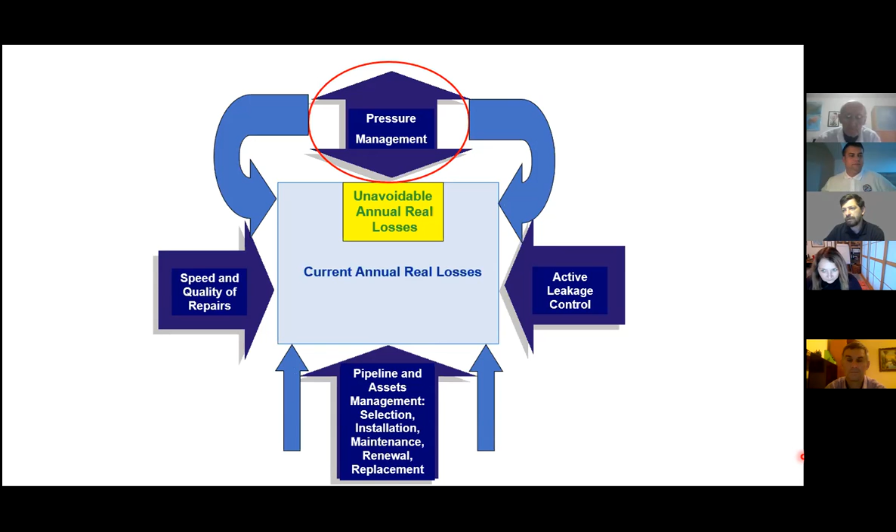Așa că înainte de 1995, din 1979 până în 1980, au existat două rapoarte Ogura în Japonia, și raportul 26 în Marea Britanie, în care se spunea că reducerea presiunii în sistemele de distribuție a redus debitul de pierderi mai mult decât prevedea teoria hidraulică, care afirma că viteza debitului de pierderi variază cu presiunea la puterea 0,5. Totodată se spunea că șocurile de presiune trebuie controlate deoarece provoacă avarii.

Din 1980 până în 1994, se spunea că utilizarea managementului presiunii pentru a reduce avariile din sistemele de distribuție și pentru a prelungi durata de viață a activelor a fost rareori menționată, nu a fost cuantificată, nu a fost înțeleasă, nu a fost raportată și nu era utilizată pe scară largă.

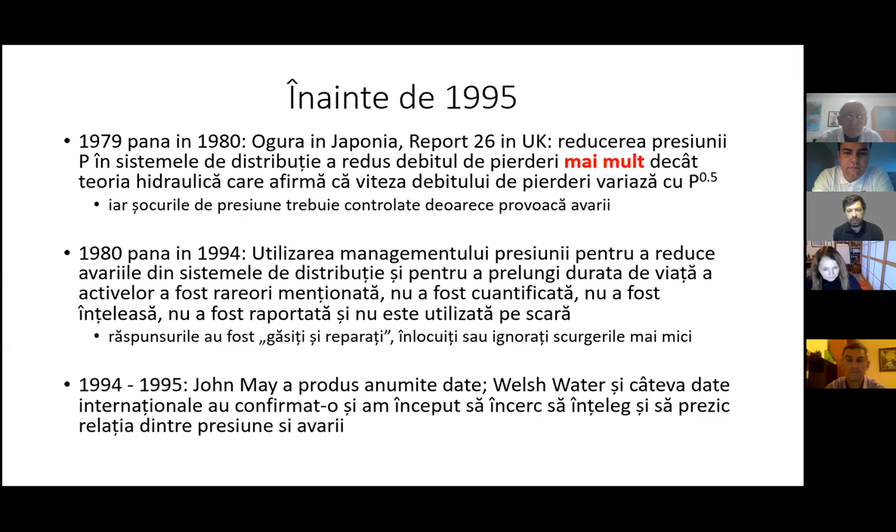Răspunsurile generale erau de tipul găsit și reparați, înlocuiți sau ignorați scurgerile mai mici. Din 1994 până în 1995, John May a produs anumite date de la compania Welsh Water, iar câteva date internaționale au confirmat-o, și am început să încerc să înțeleg și să prezic relația dintre presiune și avarii.

This is the man, John May, unfortunately dead now. He died too young, who inspired me to study pressure leakage and pressure burst relationships. With colleagues in the UK National Leakage Control Initiative 91 to 95, I had tried to understand why pressure leak flow relationships varied so much. When I first heard John speak about his 1994 World Water article, I realized he had found the answer which we had failed to find. I've continued to promote his FAVAD concept since then, initially simplified as the N1 power law, or with full fixed and variable area analysis.

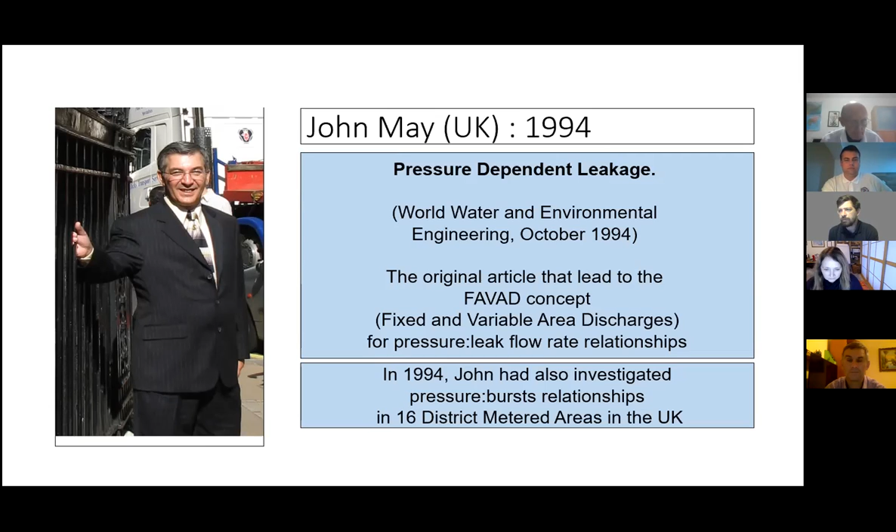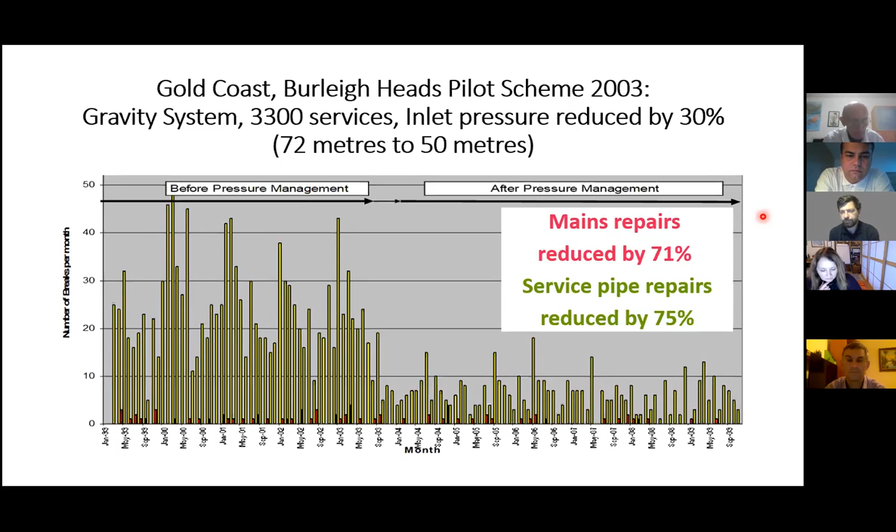Pearson and several task force members gathered before-and-after data from 50 zones in the UK, Brazil, Italy, and Australia. Some zones showed large reductions in bursts, others not so much.

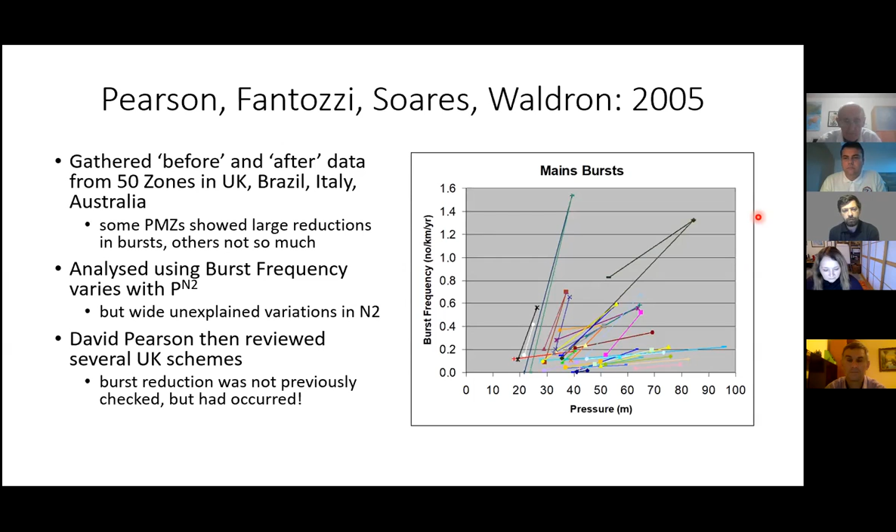Here is one of several UK examples. The pressure had been reduced from 100 meters to 50 meters in 2001, but the possibility of a change in burst numbers had not been considered. Here is one example from the UK. The pressure had been reduced from 100 meters to 50 meters in 2001, but the possibility of a change in burst numbers had not been taken into consideration.

Retrospective analysis by David showed that bursts reduced in this DMA from 34 in 2000 to 3 in 2001, 6 in 2002, 1 in 2003, 0 in 2004, and 1 in 2005. If you do not keep reliable monthly records of numbers and types of burst repairs, this kind of result can easily be missed, especially in a large utility.

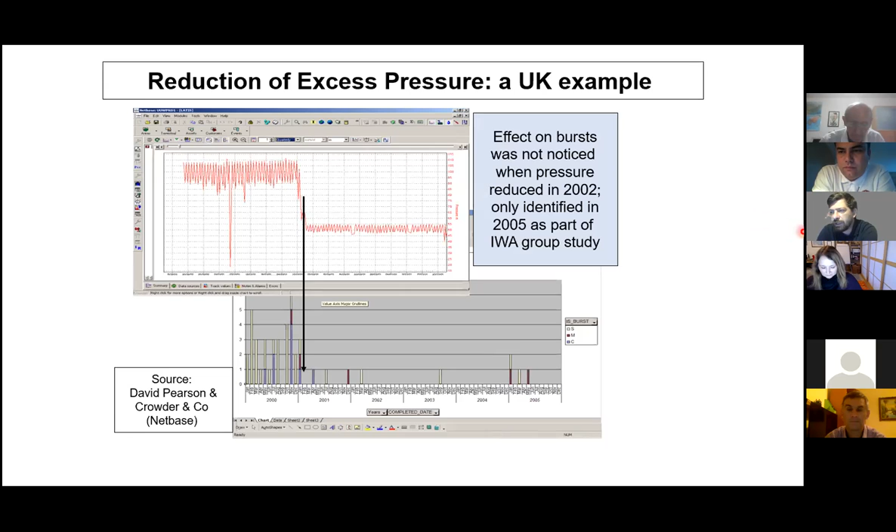Conceptul de picătură care umple paharul din 2006. Ideea este că mai mulți factori contribuie la deteriorarea unei conducte, dar presiunea în exces este acea picătură care va umple paharul. Factorii sunt vechimea și corodarea conductelor, influențe locale, cum ar fi încărcările din trafic, influențe sezoniere, cum ar fi mișcarea solului, temperatura.

Thornton și Lambert au analizat date din 112 zone din 10 țări și au propus următorul lucru: un anumit procent de reducere în rata avariilor înseamnă 1,4 ori acel procent în reducere din presiunea medie pe zonă. Deci trebuie prioritizate zonele cu frecvențe mari ale avariilor și cu cele mai mari presiuni în exces, iar apoi se realizează predicții separate pentru conducte și pentru branșament.

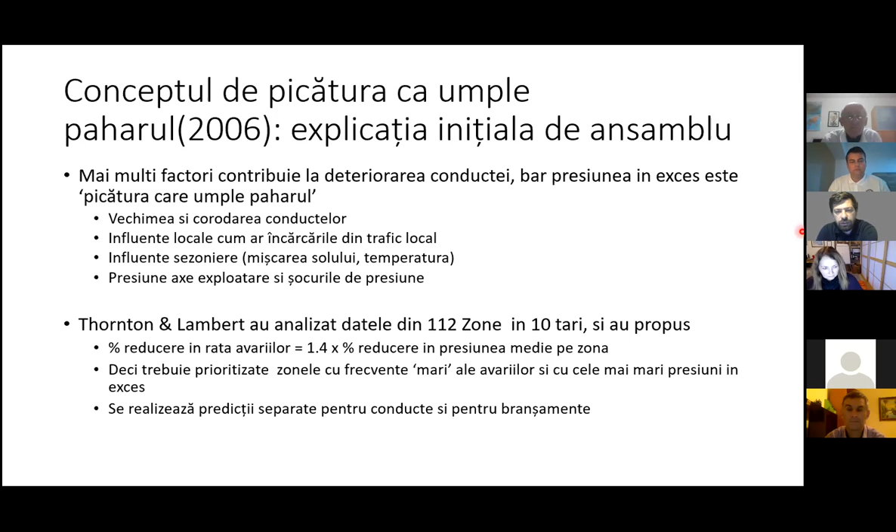This is a simplified graph of failure rate against average zone pressure. When new mains and services are laid, they are designed to withstand the existing maximum daily pressures with a large factor of safety. Acesta este un grafic simplificat al ratei defectelor față de presiunea medie din zonă. Atunci când sunt instalate conducte și branșamente noi, ele sunt proiectate să reziste presiunilor zilnice maxime existente cu un factor mare de siguranță.

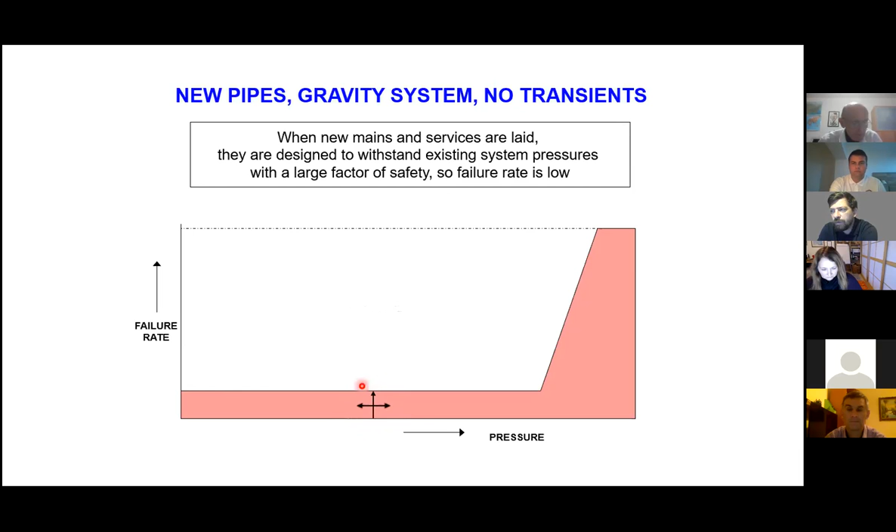If the new pipe system experienced pressure transients, the factor of safety will be reduced, but the failure rate should remain low if the maximum system pressures remain within the factor of safety. În cazul în care noul sistem de conducte prezintă șocuri de presiune, factorul de siguranță va fi redus, dar rata defectelor ar trebui să rămână scăzută dacă presiunea maximă din sistem rămâne în interiorul factorului de siguranță.

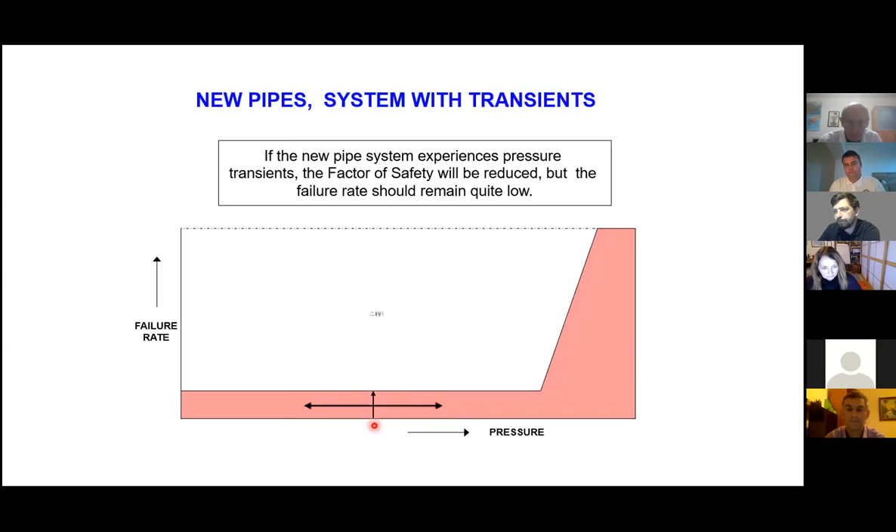As the pipes deteriorate through age and corrosion, combinations of local and seasonal factors reduce the factor of safety. Can you, that's it, thanks, Casey.

Traffic loading, ground movement, low temperatures, and the pressure at which failure occurs reduces until at some point in time, the burst frequency starts to increase significantly when maximum system pressure occurs. Pe măsură ce conductele se deteriorează din cauza vârstei și a coroziunii, combinațiile de factor local și sezonier reduc factorul de siguranță: încărcarea din trafic, mișcarea solului, temperaturile scăzute. Presiunea la care apare defecțiunea se reduce până când la un moment dat frecvența avariilor începe să crească semnificativ atunci când apare presiunea maximă din sistem.

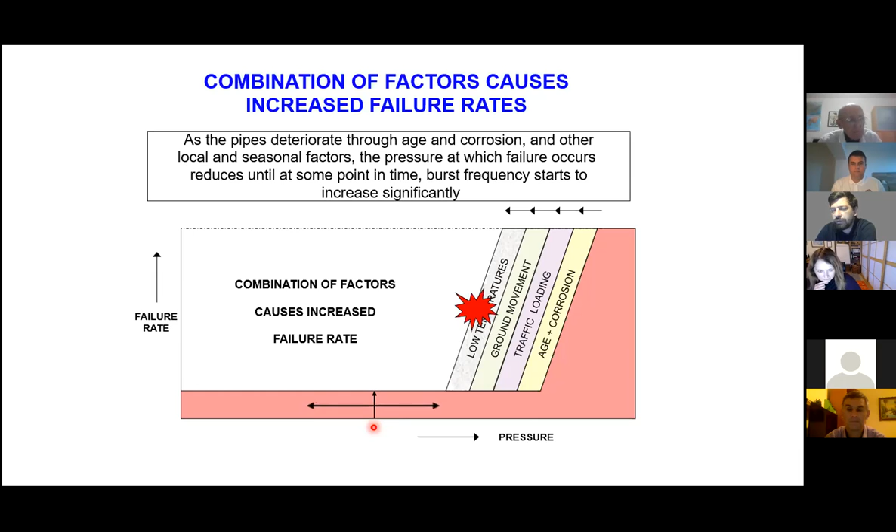Step 1 is always to check for the presence of pressure transients and reduce their range and frequency. This increases the factor of safety and can immediately reduce the burst frequency. Primul pas în reducerea presiunii este verificați prezența șocurilor de presiune și reduceți intervalul și frecvența acestora. Acest lucru va mări factorul de siguranță și poate reduce imediat frecvența avariei.

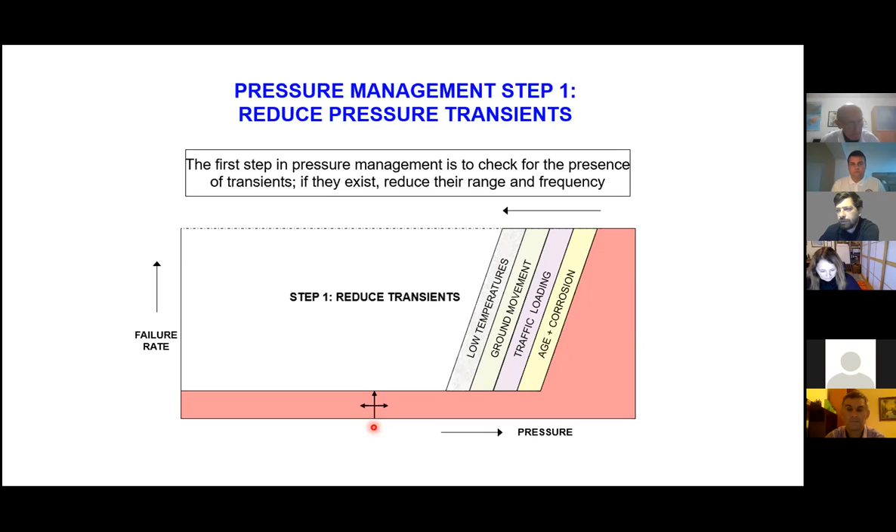Pressure management step 2 is to identify and reduce the excess maximum pressures. If the maximum pressures at the critical point are higher than necessary, then reduce the excess by pressure management to avoid operating the system close to pressures that will cause failures. Al doilea pas în managementul presiunii este identificați și reduceți presiunile maxime în exces. Dacă presiunile maxime în punctul critic sunt mai mari decât este cazul, reduceți excesul de presiune pentru a evita funcționarea sistemului aproape de presiuni care vor provoca defecțiuni.

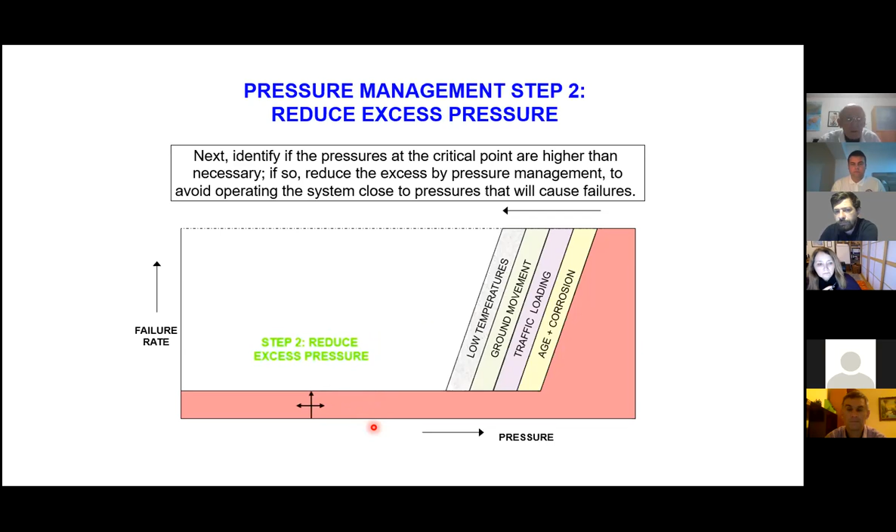So here is a simple approach to identifying zones with potential for burst reduction. If the current failure rate is quite high, that's the red circle, then even a small percentage reduction in pressure can produce a large reduction in burst frequency. But if the burst frequency is already quite low, the blue circle to the green circle, then further pressure reduction may not greatly reduce the current burst frequency, but it should extend the factor of safety and the infrastructure life.

Iată o abordare simplă a identificării zonelor cu potențial de reducere a avariilor. Dacă rata curentă de defecte este destul de ridicată, cercul roșu, atunci chiar și o mică reducere în procente a presiunii poate provoca o reducere mare a frecvenței de avarii. Dacă frecvența avariilor este deja destul de scăzută, cercul albastru până la cercul verde, reducerile suplimentare de presiune nu pot reduce frecvența actuală de avarie, dar trebuie să extindă factorul de siguranță și durata de viață a infrastructurii.

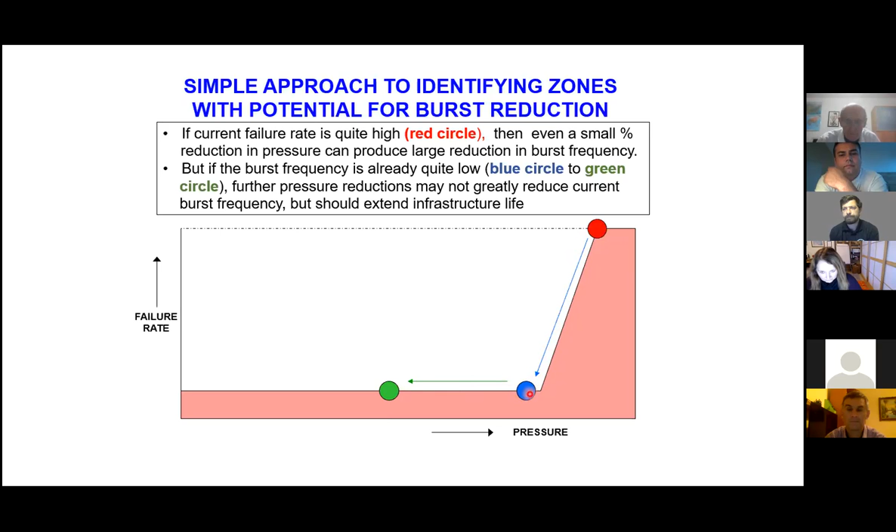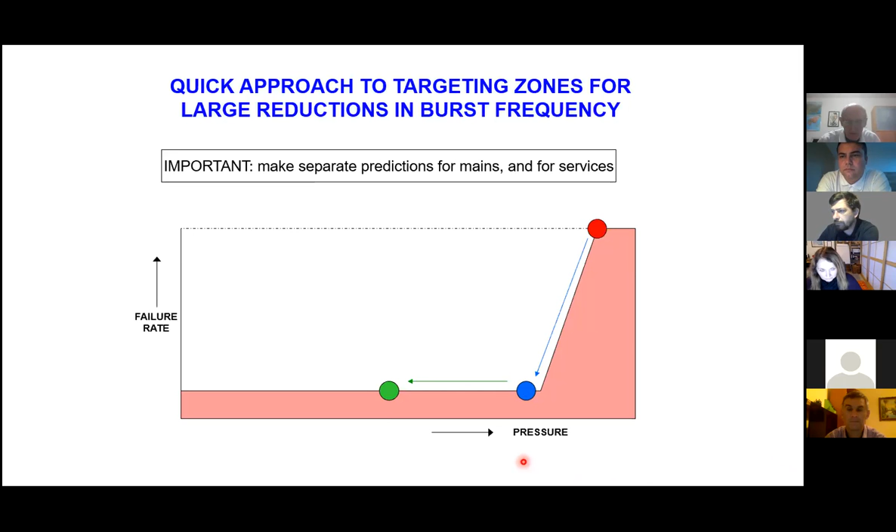Okay, so here is our quick approach to targeting zones for large reductions in burst frequency. It is important to make separate predictions for mains and for services. For the low baseline failure rate, we can use the UARL burst frequencies for infrastructure in good condition.

O abordare rapidă pentru identificarea zonelor pentru reduceri mari ale frecvenței avariilor.

Este important să se facă predicții separat pe conducții și separat pe branșamente. Pentru o anumită rată de bază pentru defecte, putem utiliza frecvențele de avarii din UARL sau din pierderile reale anuale inevitabile pentru infrastructură în stare bună. And these are mains 13 per 100 kilometer per year. On connections from main to the property line, 3 per 1,000 connections per year. And private pipes from the property line to the meter, 13 per 100 kilometers per year.

Iar aceste date sunt următoarele. Conducte sunt 13 avarii pe 100 km pe an. Pentru branșamente de la conducta principală la limita de proprietate, 3 pe 1000 de branșamente pe an, iar pentru conducte private de la limita de proprietate până la contor, 13 pe 100 de km pe an.

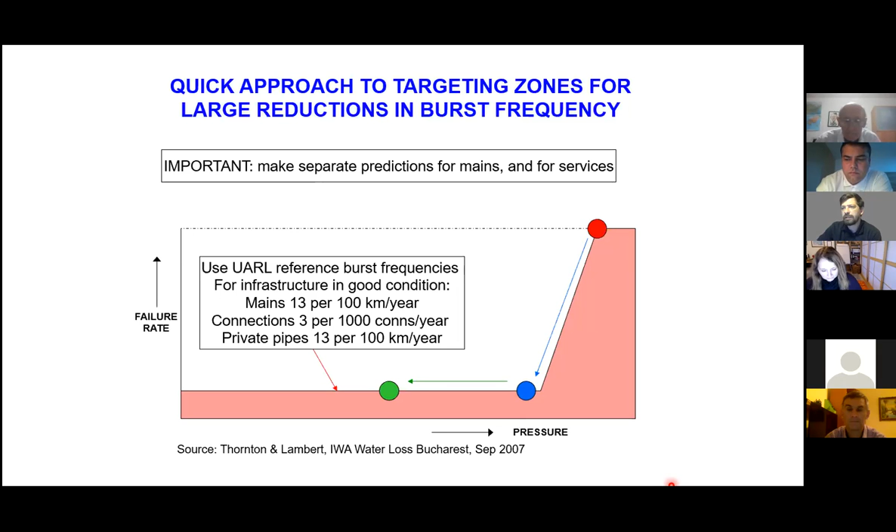So here are some of the first predictions we made in 2006 for the home utilities of the second, third and fourth chairs of the IWA Water Loss Task Force. We wanted to predict if we can expect to get significant reductions in mains bursts or service bursts, or neither or both, for individual utilities. So we calculate the ratio of actual burst frequency to UARL burst frequencies.

Iată câteva dintre primele predicții pe care le-am făcut în 2006 pentru anumite utilități de acasă, pe timpul celei de-a doua, a treia și a patra președinții a grupului de lucru IWA Water Loss Task Force. Am vrut să prezicem dacă ne putem aștepta să obținem reduceri semnificative în avariile pe conducte sau avariile pe branșamente, sau niciuna, sau amândouă, pentru utilități individuale. Deci am calculat raportul dintre frecvența reală a avariilor și frecvența avariilor inevitabile.

For Wide Bay Water, actual mains burst frequency is 13 per 100 kilometers per year, and divided by UARL burst frequency, also 13, the ratio is 1. So the mains burst frequency is okay at the UARL frequency. However, there were some pressure transients that needed attention. For services, the actual repair frequency was 33 per 1,000 services per year, compared to a UARL frequency of 3, and the ratio is high, 11 to 1. So significant burst reductions are likely on services, but not mains.

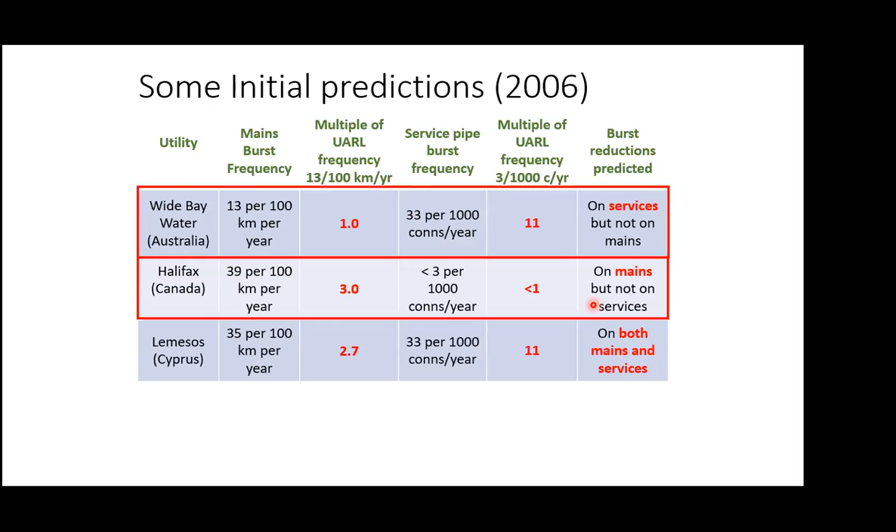Mai departe ne-am uitat la Halifax, în Canada. Frecvența de avarii pe conducte a fost de 39, de 3 ori mai mare decât frecvența pierderilor inevitabile, dar frecvența de avarii pe branșamente a fost foarte mică, de mai puțin de o dată frecvența de pierderi inevitabile. Așadar, după managementul presiunii, ne putem aștepta la unele reduceri a avariilor pe conducte, dar nicio reducere a avariilor pe branșamente, ceea ce s-a întâmplat.

Then we looked at Lemesos in Cyprus. The mains burst frequency, 35, was 2.7 times the UARL frequency, and the service burst frequency was 11 times the UARL burst frequency. So after pressure management, we can expect some reductions in both mains bursts and service bursts, which is what happened as reported by Bambos Charalambous in a paper to Waterloss 2005.

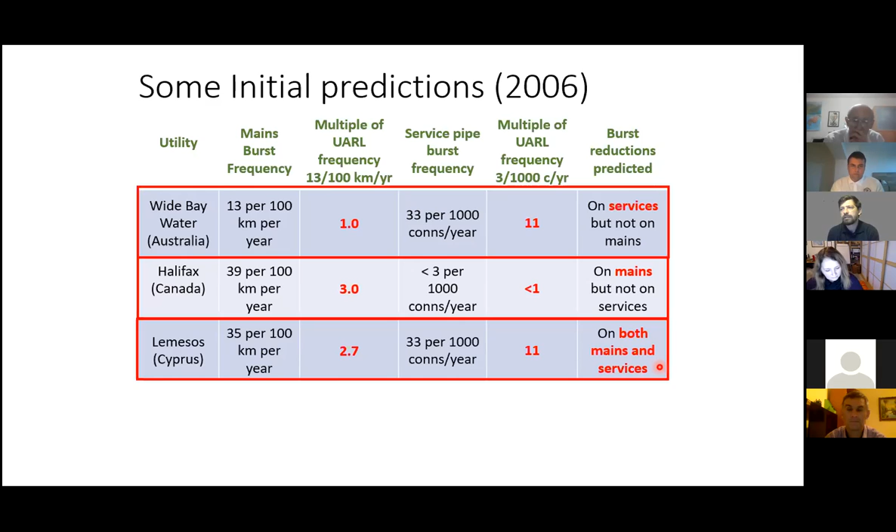Apoi ne-am uitat la Lemesos în Cipru. Frecvența de avarii pe conducte, 35, a fost de 2,7 ori frecvența inevitabilă, iar frecvența de avarii pe branșamente de 11 ori frecvența de pierderi inevitabile. Așadar, după implementarea managementului presiunii, putem aștepta la reduceri de avarii atât pe conducte cât și pe branșamente. Ceea ce de asemenea s-a întâmplat, așa cum a raportat Bambos Charalambous într-o lucrare din Waterloss 2005.

So quick qualitative predictions like these can be used to target zones for pressure management to reduce bursts.

Deci, previziuni calitative rapide ca acestea pot fi folosite pentru a viza zonele pentru managementul de presiune în scopul reducerii avariilor.

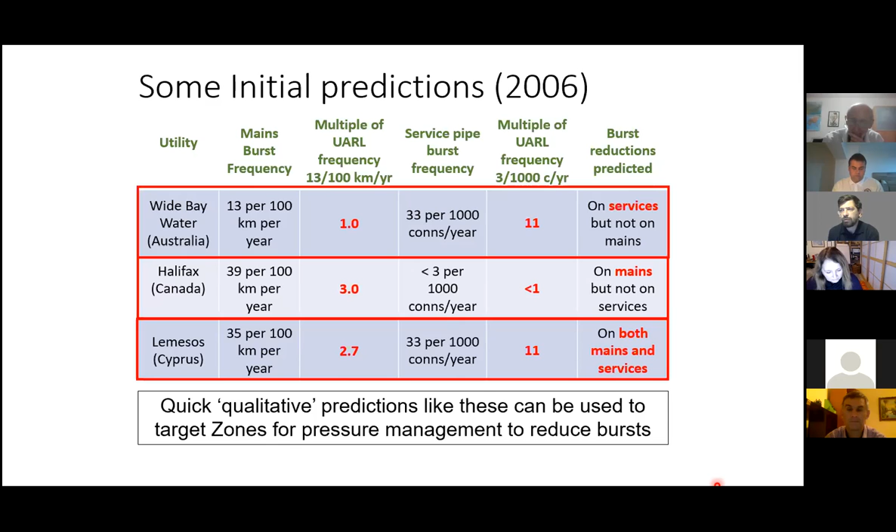After using the quick method to identify zones with the highest burst frequencies on mains and separately on services, we want to predict how many bursts we will save, and that depends on how much the pressure can be reduced. The simple rule for high burst frequency zones proposed by Julian Thornton and myself was: percentage reduction in bursts is 1.4 times the percentage reduction in maximum average zone pressure.

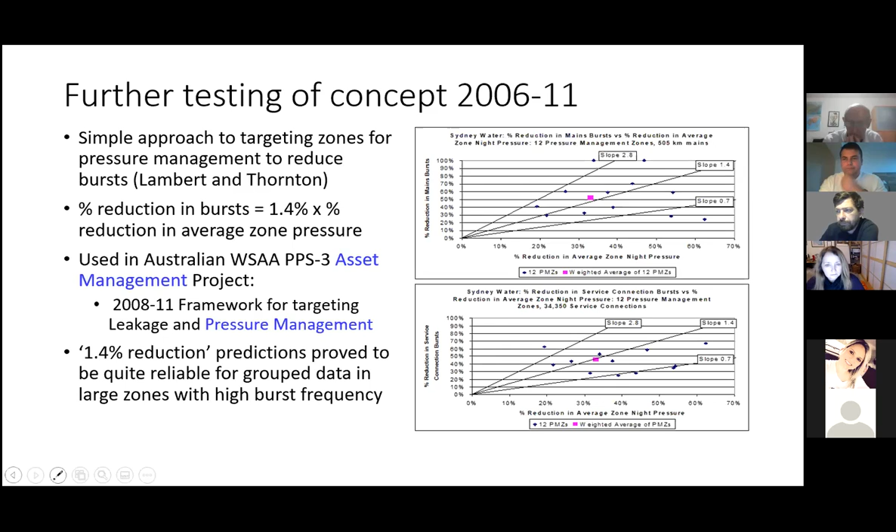For the Australian project, I also developed a quick method of tracking overall reduction of bursts for projects in which multiple pressure management zones are being created over several years, compared to a control dataset. The whole system is split into zones which are to be newly pressure managed, called PMZs, and a control dataset of the remaining zones, non-PMZs, which will continue to operate as before. For the period of several years before the first PMZ is created, a relationship is created of cumulative bursts in PMZs on the y-axis against cumulative bursts in the non-PMZs, which is the red line.

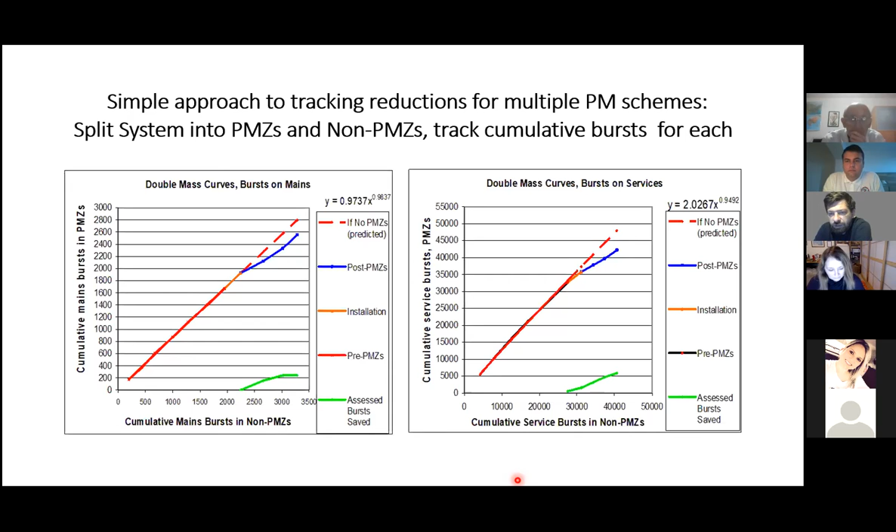Sunt necesare date asupra intervențiilor din rețea și presiune. Trebuie analizate numai intervențiile sau avariile pe conductele principale și la îmbinări, pentru conducte din azbest și fontă. Se separă aceste date după tipul de defect și dimensiunea conductei: fisuri, despicături longitudinale, găuri datorate coroziunii sau defecte la îmbinări. De asemenea, se vor analiza separat intervențiile la hidrant și vană.

În ceea ce privește intervențiile asupra branșamentelor, se analizează numai acele avarii sau intervenții de pe conducta de branșament, dar și la conexiunea cu conducta principală. Se analizează separat intervențiile cu pierderi mici la robinetul de concesie și la contor. Trebuie să măsurați presiunea în punctul de presiune mediu pentru a folosi aceste metode de predicție.

Ecuația avarii-presiunii, această relație care a fost îmbunătățită în anul 2012. Dacă frecvența avariilor în România este mare, atunci abordarea de 1,4% din reducerea în presiunea medie pe zonă poate funcționa ok pentru prioritizarea zonelor și pentru anumite predicții.

Cifre și date de o mai bună calitate asupra avariilor și presiunilor medii pe zone au fost disponibile pe timpuri și după criza de secetă din Australia între anii 2008 și 2011. Am utilizat aceste date pentru a cerceta și dezvolta o relație îmbunătățită presiune-rata avariilor pentru a fi utilizată în toate zonele cu frecvența avariilor pe conducte și branșamente, de la foarte mică la foarte mare. Următoarele diapozitive oferă o scurtă privire de ansamblu asupra metodelor predictive rezultate, cu câteva comparații între predicții și rezultatele reale.

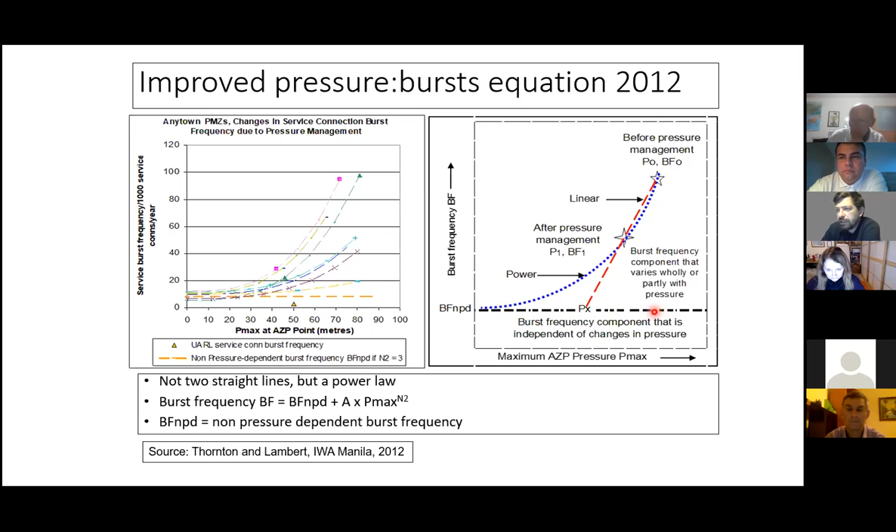După 12 luni de cercetare cu date înainte și după, date despre avarii în zonele mari administrate de presiune din Australia, am dezvoltat o metodă îmbunătățită de predicție a presiunii avariilor, care are două componente. Privind graficul din dreapta, linia orizontală inferioară este o componentă care nu depinde de presiune, de frecvență de avarii. Componenta dependentă de presiunea avariilor nu este o linie roșie dreaptă, ca în metoda de predicție anterioară din 2006, ci este o lege a puterii, o relație cubică la puterea a treia.

The left-hand graph shows examples for service bursts in Australian zones with a cubic power law fitted through the before and after burst frequencies and pressures. At zero pressure, the points converge to give an estimate of BF-NPD, the non-pressure dependent burst frequency. So, to summarize, the relationship is not two straight lines, but a two-part equation with a fixed burst frequency BF-NPD and a variable burst frequency based on a power law.

Graficul din stânga prezintă câteva exemple de avarii pe branșamente din zonele din Australia cu o lege a puterii cubice încorporată prin frecvențele și presiunile de avarii înainte și după. La presiune 0, punctele converg pentru a da o estimare a coeficientului BF-NPD, care înseamnă frecvența de avarie care nu depinde de presiune. Deci, pentru a rezuma, relația nu este dată de două linii drepte, ci de o ecuație din două componente cu o frecvență de avarii fixă BF-NPD și o frecvență de avarii variabilă bazată pe o lege a puterii.

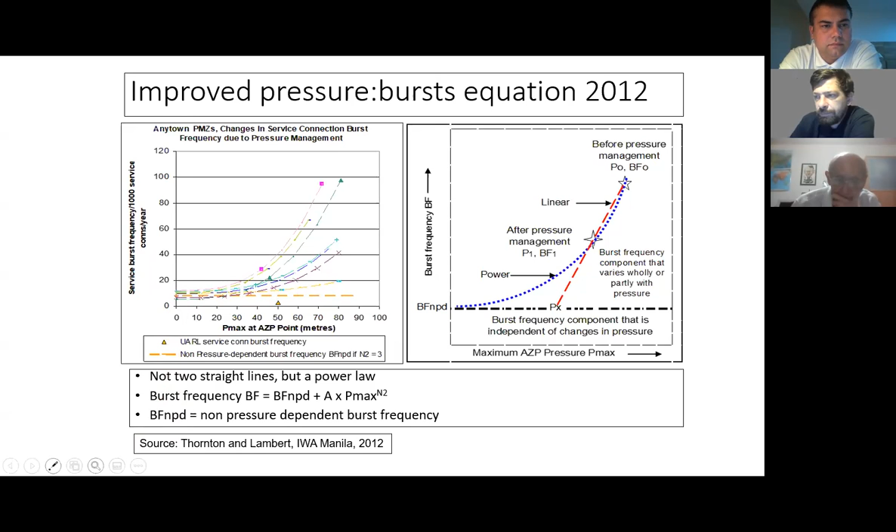If you don't have any before and after test data, you can get a quick estimate of the fixed component of burst frequency BF-NPD. For zones with more than 10 bursts per year on mains or more than 10 bursts per year on service connections, plot the individual zone values for burst frequency and pressure on a scatter plot and estimate a baseline value for BF-NPD.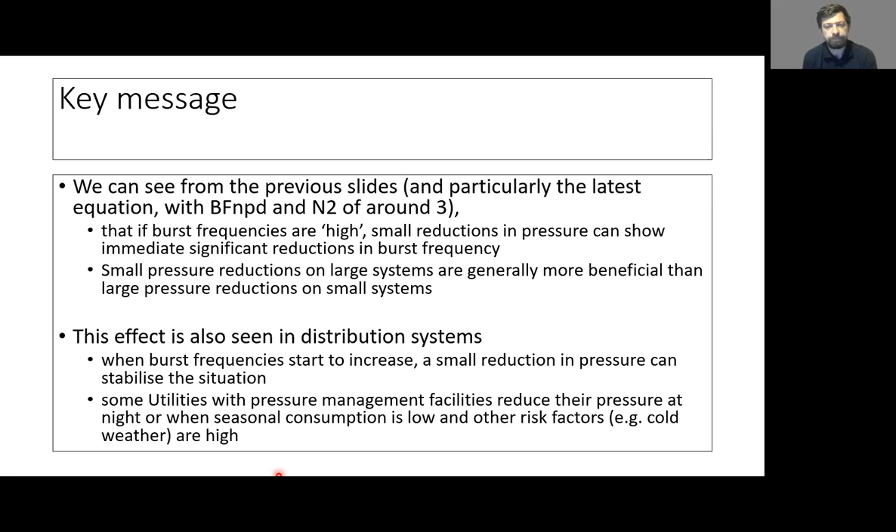Okay, here are some retrospective comparisons of the improved prediction method for large Australian pressure managed zones. The first graph for service connection failures compares the predicted reduction in service bursts in 10 zones with the actual reduction in service bursts, and the correlation is very high. In fact, it's almost 1.

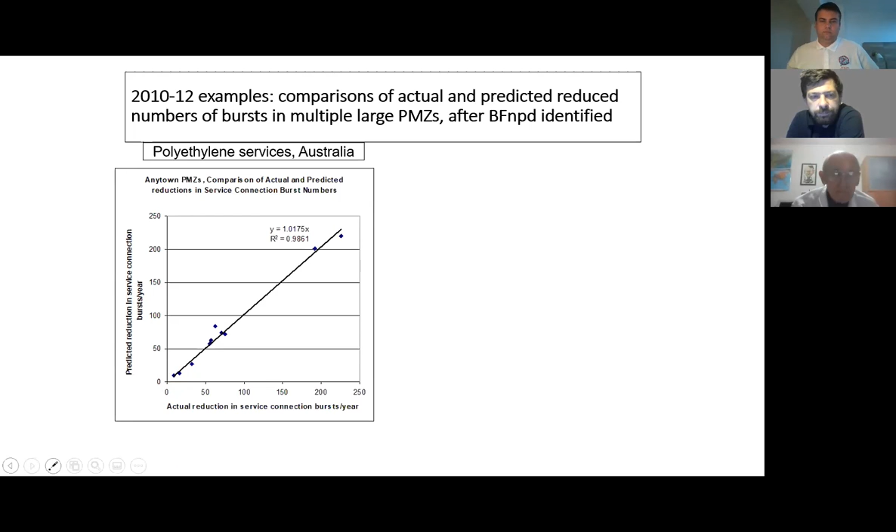In the second graph for mains, the new method, the upper line, is compared with the old 1.4 times method, which is the lower line. And the new method gives better predictions. The correlation coefficient is 0.9.

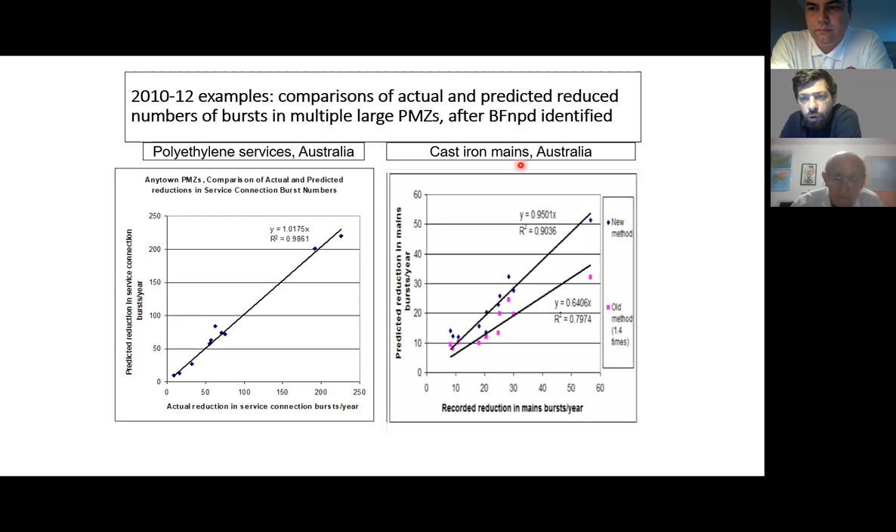Okay, Keith. Here is the improved prediction method applied to 131 kilometers of Durban Central Business District. The average burst frequency before pressure reduction is 30 per 100 kilometers per year, with seasonal peaks and troughs ranging from rates of 20 to 60 per 100 kilometers per year. After pressure reduction, the new method predicts an annual average of 12, and the actual average is 10, with much lower seasonal variations. And pressure management has the greatest influence in reducing the seasonal maximum burst frequencies.